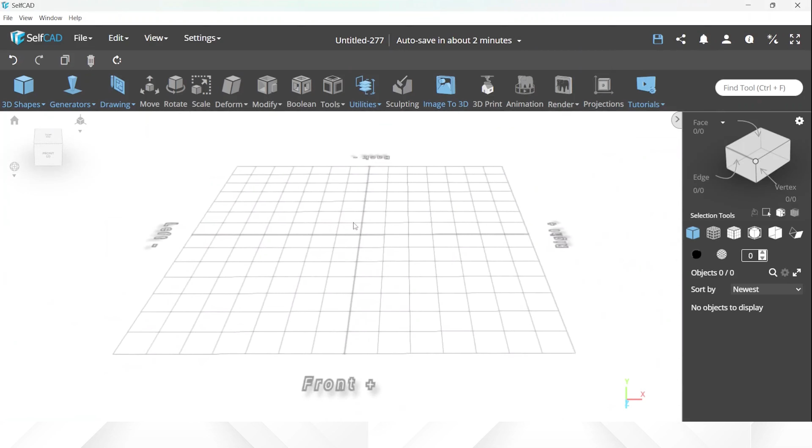To begin, go to the 3D Shape section and select Sphere. Adjust the radius, horizontal segments, and vertical segments by setting all of them to 50. Then finalize the sphere. This will give us a starting point for building the egg shape.

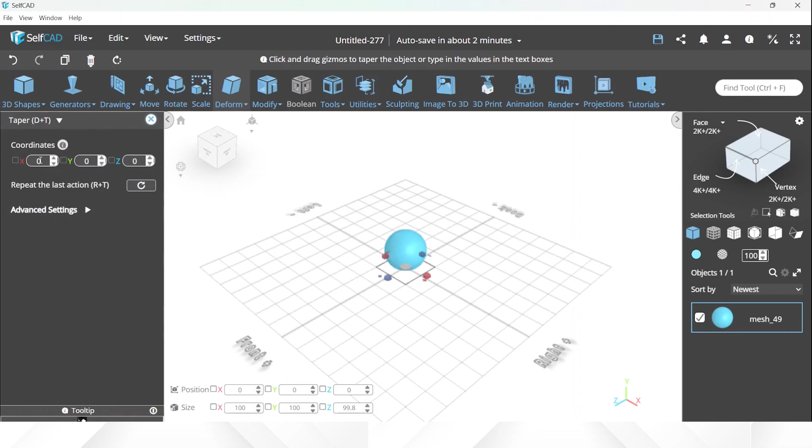Next, go to the Deform section and choose Taper. In the Settings window, set the X and Z values to -25. This changes the sphere into a more natural egg shape by narrowing the top and keeping the bottom fuller. Once that is done, close the Taper tool.

Now that the outer form is ready, we need to modify it further. Since this Easter egg is meant to open, it needs to be hollow inside. Go to the Modify section and select Add Thickness. Set the thickness to 5, then finalize. This creates a shell and gives the egg enough wall thickness to be practical for 3D printing.

The next part is to separate the egg into two halves so it can function like a container. Go to the Modify section again and select Cut with Plane. Choose Bottom Top, then increase the plane offset. For this example, set it to 50. The section that will be cut is highlighted and changes color.

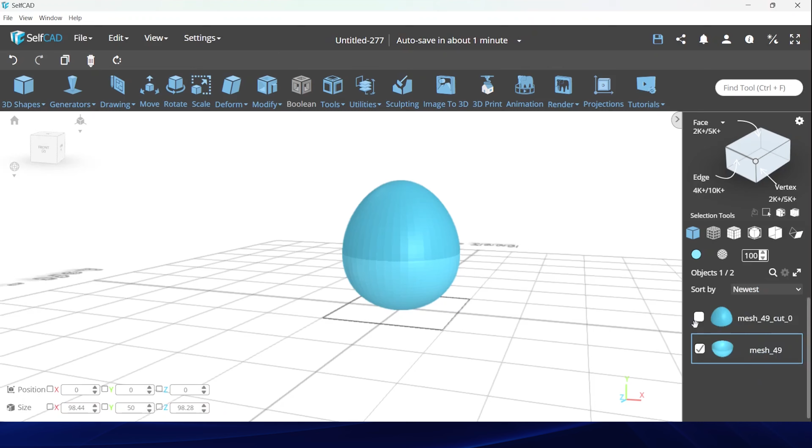In the Advanced settings, make sure Split Objects is set to True. Then finalize the cut. You'll now see two separate parts in the Objects panel. At this point, the model has changed from a single object into a design with a top and bottom section. Select the top object, which will serve as the cover, then click the Settings icon and choose Hide. This allows us to focus on the bottom half first.

You'll notice that the egg is now hollow, but the cut edges are still open. Since we want a clean and printable result, those open edges need to be closed. Go to the Tools section and select Fill Polygons, then finalize by clicking the check mark. Now the edge is sealed and the bottom half looks more complete.

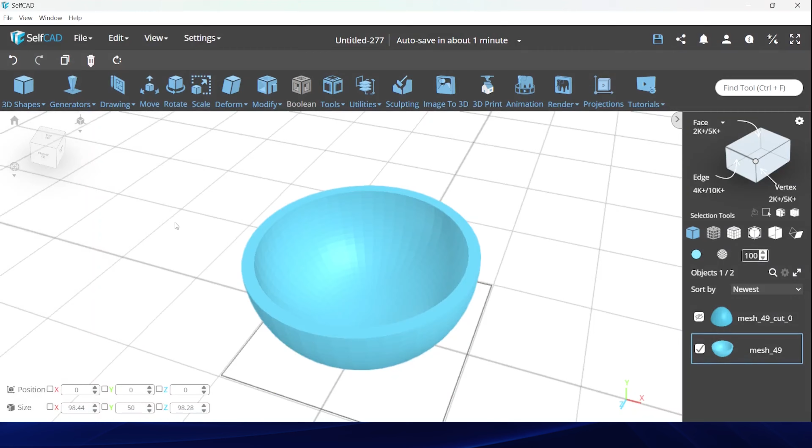But if both halves remain equally thick, the lid may not close properly after printing. So instead of stopping at shape alone, we also need to think about how they fit together. To create space for the lid, go to the 3D Shape section and select Cylinder. Adjust the top radius, bottom radius, height, and Y position so the cylinder fits into the upper area of the bottom half of the egg.

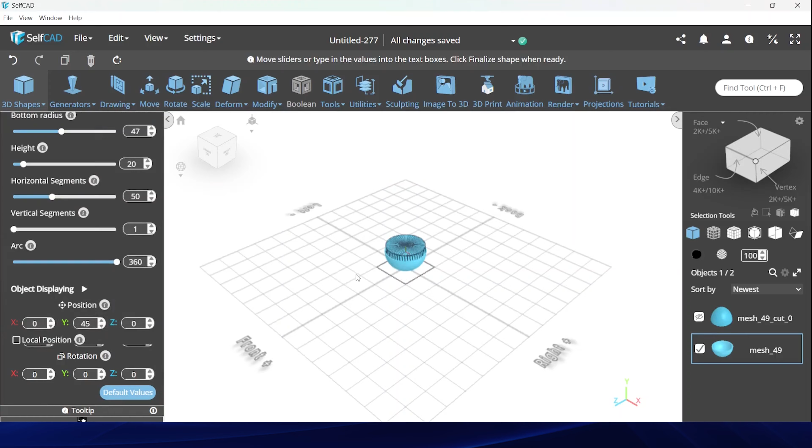The purpose here is to remove some material from the inner top edge and create a thinner section where the lid will sit. Next, go to the Boolean section and choose Difference. Select the cylinder mesh, then finalize. As you can see, the upper edge of the bottom section is now thinner than the rest. This gives the lid room to fit more easily.

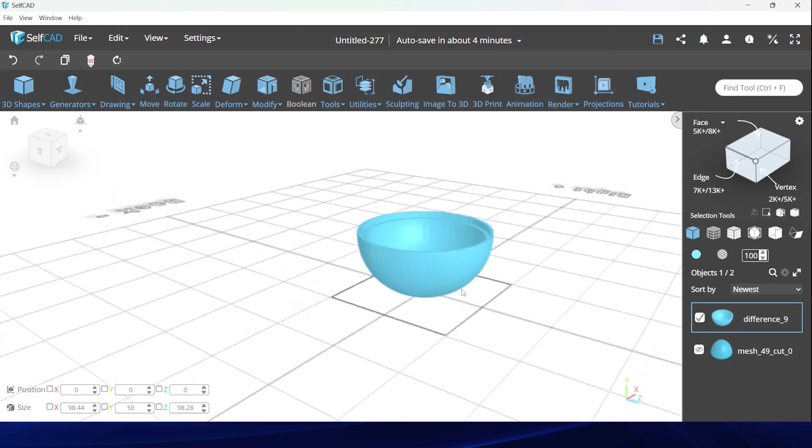Now, unhide the top section of the egg and hide the bottom section. Just like the bottom half, the top section also has open edges that need to be fixed. Go to the Tools section, click Fill Polygons, and finalize it. Once that is done, unhide the bottom section again.

Select the top section, then choose the Move tool. Set the Y position to 47 so the top section moves slightly into the egg. This helps position it correctly against the thinner edge we created in the bottom half.

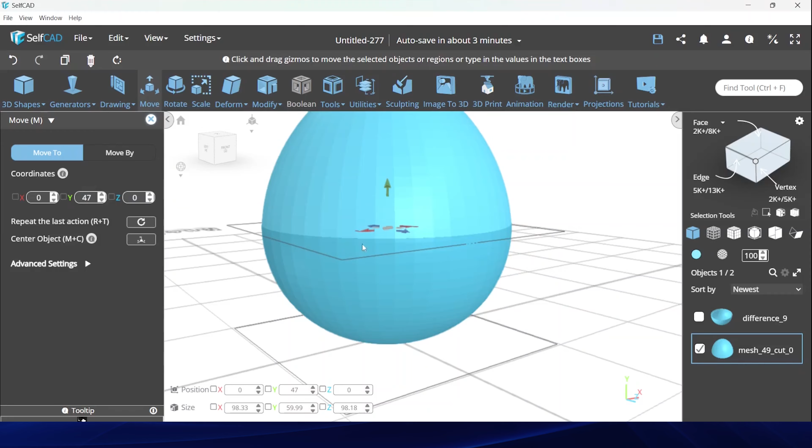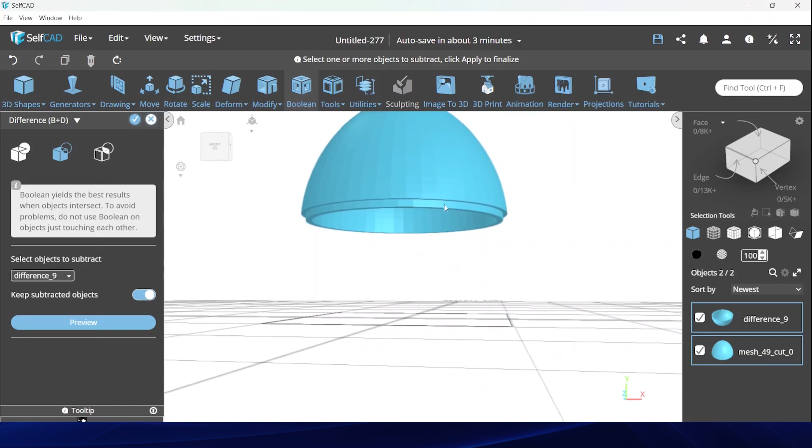Now we'll improve the fit between the two parts. Select both sections, go to Boolean, and choose Difference. Select the bottom section and make sure Keep Subtracted Objects is enabled. As you can see, some geometry is now transferred to the top section. This helps both halves align better and makes the egg easier to close after printing.

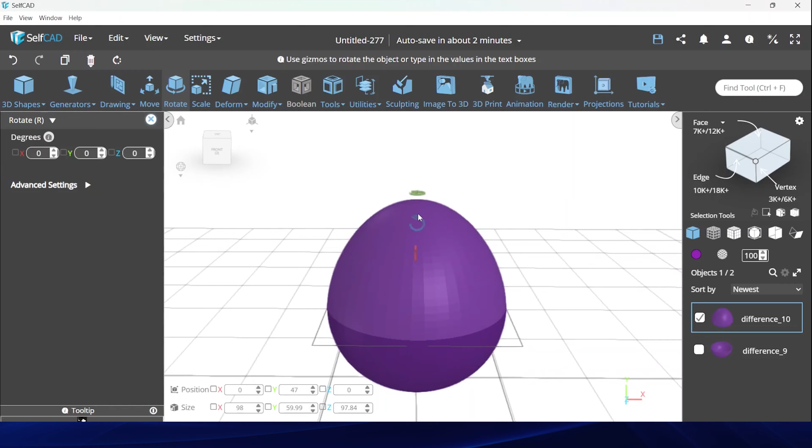You can also customize the look of your Easter egg by clicking the Color option and choosing any color you like. To properly view the top and bottom sections of the model, select the Rotate tool and rotate the top section slightly so both halves are easier to see. Once the modeling process is complete, slice the model and send it for 3D printing. Your 3D print is now ready.